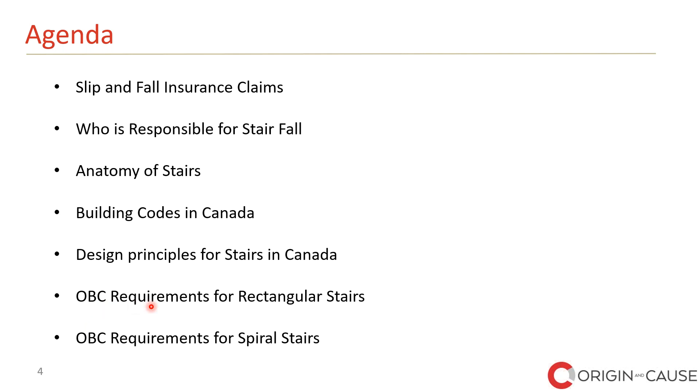In this presentation, first I will talk about slip and fall insurance claims. I'll give some statistics on that for Canada and US. We'll talk about who is responsible for stair fall. We'll give the anatomy of stairs and introduce some terms there. We'll briefly talk about building codes in Canada and how they are set up. We'll talk about design principles for stairs in Canada, and then we'll delve into Ontario Building Code requirements for rectangular stairs and also for spiral stairs. We will then talk about safety requirements for stairs in Ontario Building Code, and we will talk about historical changes in OBC requirements. Then we'll give some concluding remarks.

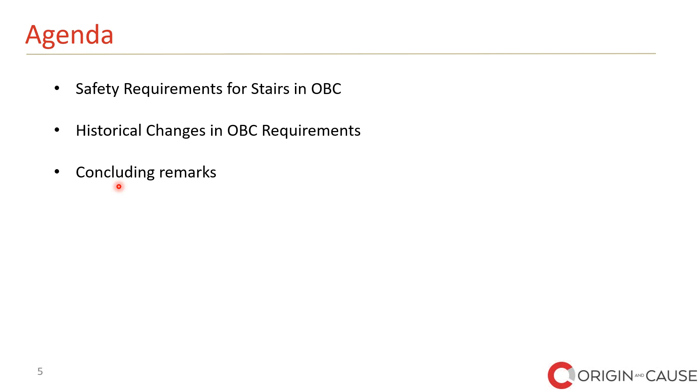Now let's look at some statistics about slip and fall on stairs. In the US, fall on stairs is the second most common cause of accidental death after car accidents. In British Columbia, about 8% of hospitalizations were due to stair-related injuries, based on the BC Injury Research and Prevention Unit, published in 2017. The same report said the cost of hospitalizations was over $17 million during the 2013 and 2014 fiscal year. The societal economic cost of stair-related accidents in Canada was $19.8 billion in 2004, according to Public Health Agency of Canada. Societal economic cost is the sum of medical cost, loss of productivity, and loss of quality of life.

So you can see that there's a huge impact on the quality of life and lives, and also on the economy. There's a huge impact by slip and fall accidents.

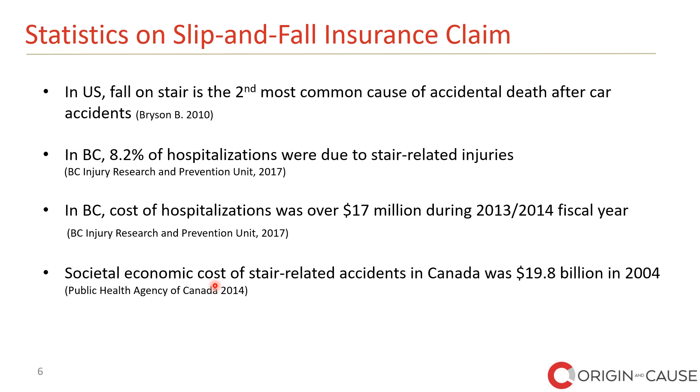Now let's see who is responsible for a stair fall. In terms of hierarchy, first is the designer. The designer should always design the stairs based on the building code of the jurisdiction. In Ontario, it's Ontario Building Code. In Alberta, for example, it's Alberta Building Code. Then the contractor is responsible to follow the design drawings and build the stairs according to the design and the drawings. Then the owner is also responsible to maintain the stair to keep meeting the requirements of the building code. And the stair user should also use the stair as it's intended to be used.

Now, for example, let's say a stair is perfectly designed and the contractor didn't follow the drawings and didn't install the handrails properly. That's the contractor's responsibility.

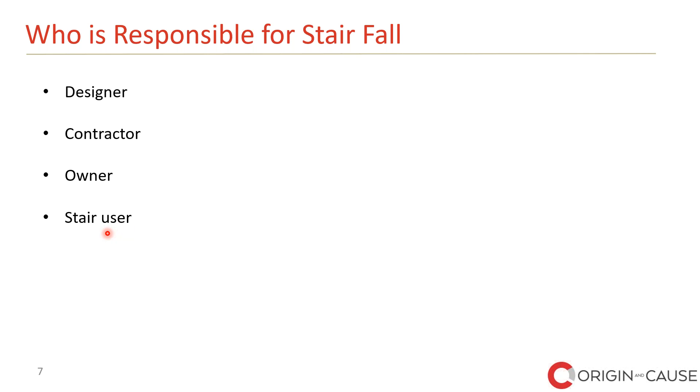Or let's say the stair is designed properly and the contractor built it correctly, but for some reason the owner decided to paint the stairs in such a manner that it's kind of invisible. So if you can see here on your left, the stairs cannot be distinguished. So if someone slips or trips over these steps, that's the owner's responsibility. We will talk about these later in this presentation.

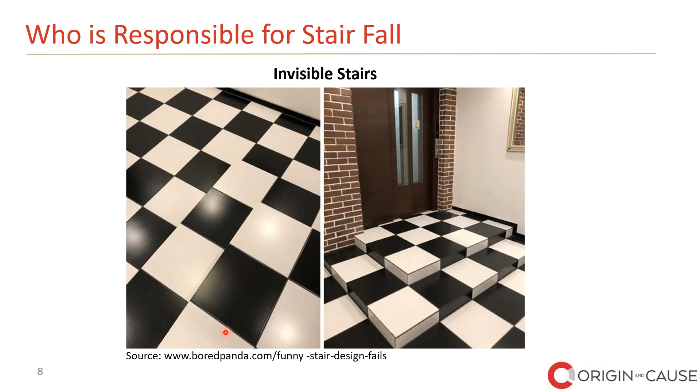Before we delve into the requirements of the steps, let's take a look at the anatomy of the stair. In this schematic, you can see a stair. This is the flight of stair. This is the floor level. You climb up the stair, you come up to a landing.

You have handrails. You have extension of the handrail at the top and bottom of the handrail. We'll talk about that. You have the ceiling above the stair, and you have the stair width. The stair width should be enough for people to climb up and down.

If I take a look at a step, it has a vertical element and a horizontal element. The vertical element is called the riser, and the vertical dimension of a step is called the rise. The horizontal dimension is called the run. And sometimes you have a projection of the runner beyond the adjacent step. This projection is called nosing.

Then we have a dimension called tread depth. So tread depth equals run plus nosing.

So when it comes to handrail, sometimes you have a wall beside the stair, and then you have the handrail right beside the wall. There should be a clear distance between the handrail and the wall. Otherwise, when you try to grab the handrail, you hit the wall and you cannot grab the handrail when you lose balance.

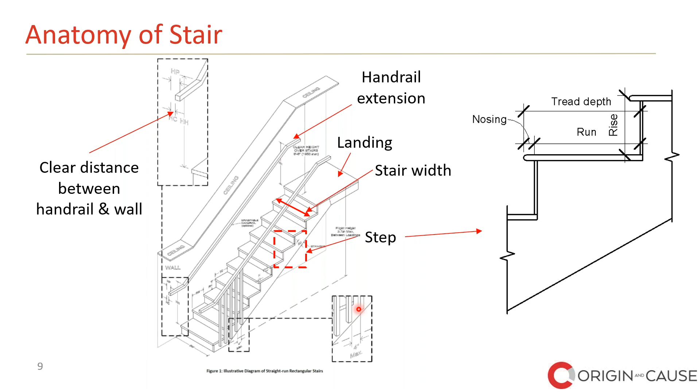Now, when it comes to stair types, the Canadian Building Code defines 3 classes of stairs: rectangular stairs, angled stairs, and winders. For angled stairs, you can see that the treads are not of uniform width. They are trapezoidal to make a turn, a kind of spiral shape. And then winders, the tread edges are concentric, so some of the treads are triangular.

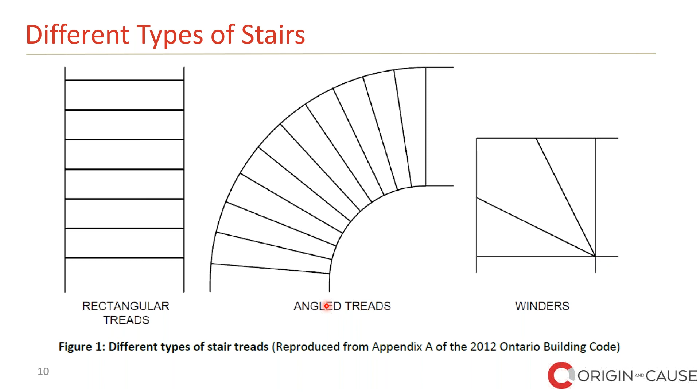Now, let's take a look at the building codes in Canada. In Canada, we have the National Building Code of Canada, which is just a model code and does not have legal status. It was first published in 1941, and it's been updated since then every 5 years on average. The latest edition is 2015. Provinces and jurisdictions in Canada adopt or amend the National Building Code, and then it becomes a legal document.

In Ontario, for example, we've adopted the National Building Code and changed it a bit, and now we have the Ontario Building Code. Other provinces do the same way. In Nova Scotia, for example, they exactly adopt the National Building Code with maybe some minor changes here and there. In Ontario, as I said, we have the Ontario Building Code.

It was first published in 1975, and the latest edition is Ontario Building Code 2012, which is OBC 2012. This is now the legal document in Ontario. In every province, as I said, they have their own building code, which is based on the National Building Code of Canada.

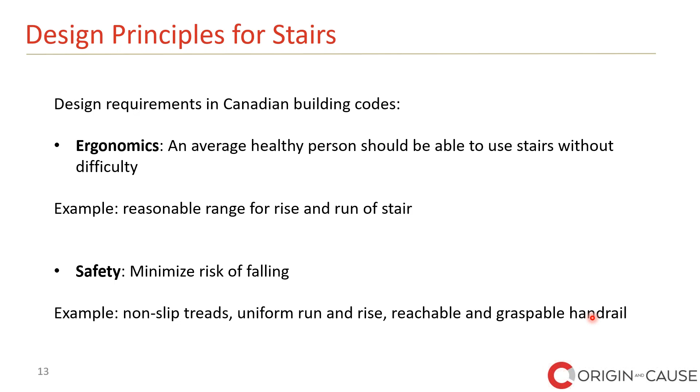Now I'm going to give you an example of a situation where these requirements are not met. This is a stair flight to a subway station in Sunset Park, New York.

Someone took photos of people tripping over a step on this stair flight, and it went viral on the internet. Apparently there was one step at the top of the flight that a lot of people would trip over. So it went viral, and somebody investigated and found there's a half-inch difference between one of the steps and the adjacent steps at the top of the flight.

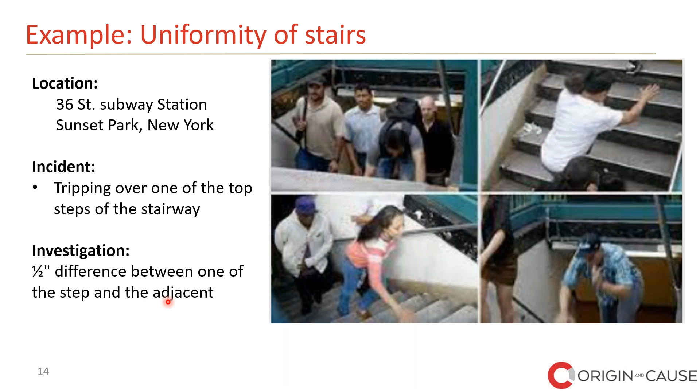When you think about a half-inch difference, you can't really see it. So I'm showing the section of the stair. One of these steps is half-inch higher than the other, but you cannot really see it visually. Here it is - this stair has all uniform rise. This stair flight, one of the rises is half-inch higher.

So a small difference can make a safety hazard.

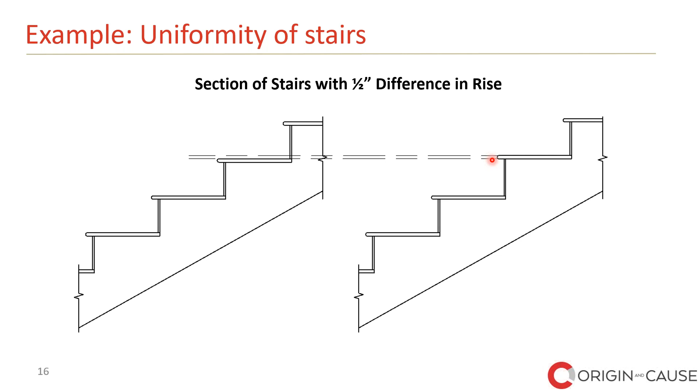Now I should mention that in any stair flight, when you take the first few steps, your brain automatically calculates the dimensions of the steps, and after that your brain automatically adjusts your stride, so you don't need to individually measure or look at the steps. It's your brain adjusting your stride based on pre-calculated dimensions from the very few steps you took. Now if along the way one step is odd, you'll trip over it because it doesn't match the calculations. So it's very important to have uniform steps with the right size and dimensions.

Now let's take a look at some of the OBC requirements for rectangular stairs. As I said, rectangular stairs have uniform width along the step.

Width of stairs in residential buildings should be 36-inch minimum. Stairs serving single dwelling units, which are single family houses, should be minimum 34-inch wide. Stairs in non-residential buildings should be minimum 36-inch wide, or 5/16 of an inch per person based on occupant load limits specified by the Ontario Building Code.

The Ontario Building Code has a long table which gives the minimum area per person for that specific type of building. For example, for classrooms it says there should be a minimum of 19.91 square feet per person. In a school shop or vocational room, it should be 100 square feet per person.

Now based on these, technically, you can calculate the maximum number of people who are allowed to use a specific building based on the Ontario Building Code. Let's take a look at an example.

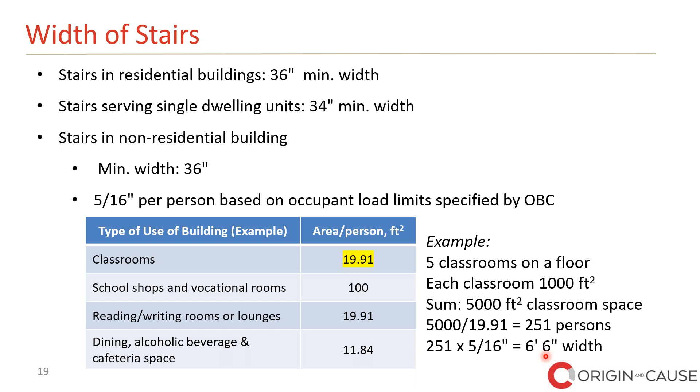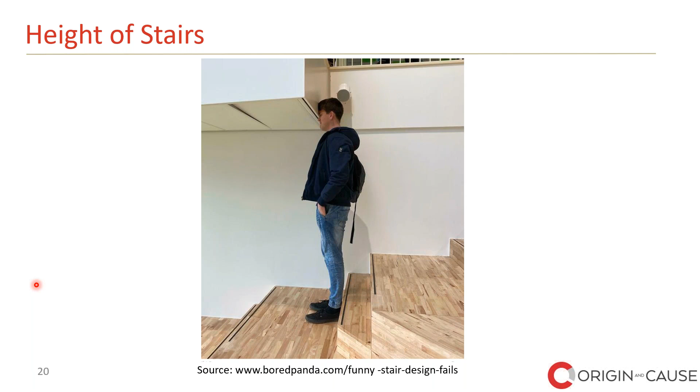Now, height of stairs. Obviously the stairs should have enough headroom so you don't bump your head on the ceiling. The Ontario Building Code states there should be a minimum of 77 inches of headroom in single dwelling units, which are single family houses, or a minimum of 81 inches in other buildings.

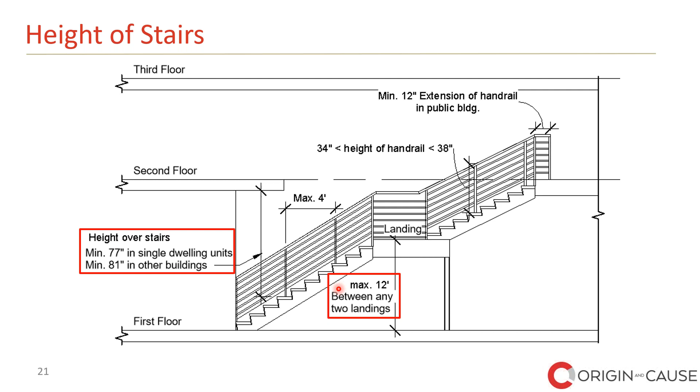And between adjacent or consecutive landings, there should be a maximum of 12 feet height between consecutive landings. This is to avoid fatigue when using stairs - if it's higher than that, you get tired by the time you get up the stairs.

Run and rise of steps: there should be a minimum number of risers in dwelling units, in houses. Less than 3 risers is a tripping hazard.

The dimensions are given in a table in OBC 2012. For rise, for service and mezzanines, minimum 5 inch, no maximum. For private buildings, houses, the rise should be between 5 inch and 8 inch. For public buildings, 5 inch and about 7 inch.

Here I should mention that in general, the requirements for public buildings are more strict than requirements for houses. The reason is that for houses, you are very familiar with the environment of your house and the stairs in your house. But for public buildings, people are not familiar with the environment, so the requirements for public buildings are more strict.

Let's get back to the table. For rectangular treads, the run, which is the horizontal dimension of the step, should be maximum 14-inch for service and mezzanine spaces, and between 8.25-inch to 14-inch for private buildings and houses, and should be minimum 11-inch for public buildings. Tread depth, as I mentioned, is run plus nosing.

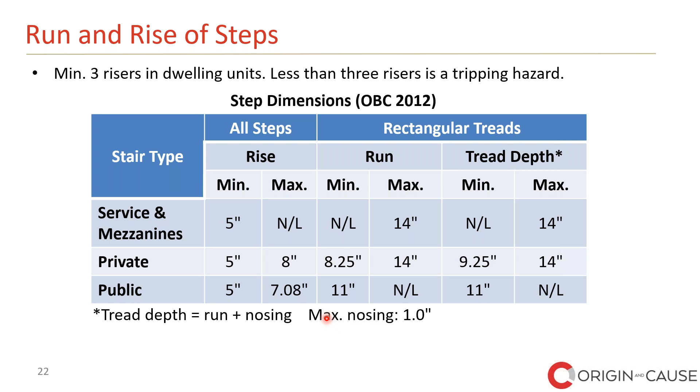Where you have a winder, first of all, the winder should be less than 90 degrees, and the angle treads should be between 30 to 45 degrees of angle, and the run is measured at the center of the step. So the average run should be between 6-inch and 8-inch.

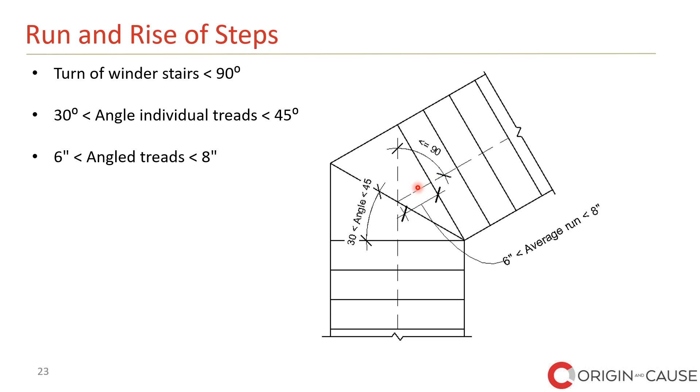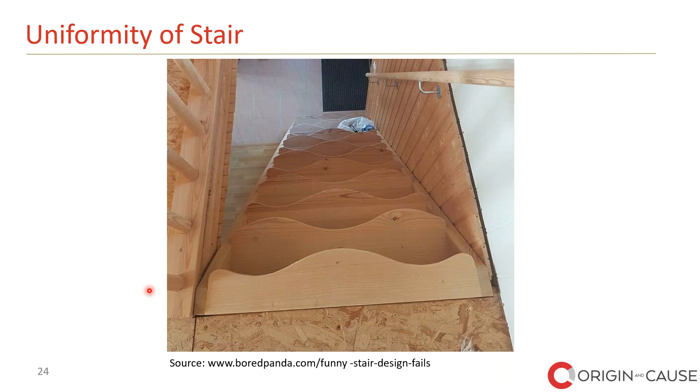Uniformity of stairs: stairs should be uniform so that you don't have to individually look at the steps to calculate what kind of stride you need to take. As I said, that's how your brain adjusts your stride as you are walking up and down the steps. After a few steps, your brain has pre-calculated dimensions, and then it uses those dimensions to adjust your strides as you walk up and down the stairs.

The tolerance of rise and run between adjacent treads should be 3/16 of an inch, that's about 5 millimeters. The difference between the largest and smallest run and rise should be 3/8 of an inch, which is about 10 millimeters. The slope of treads should be less than 1/50.

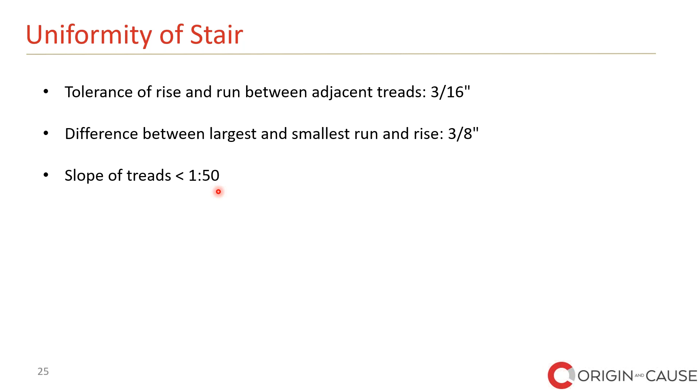These requirements are given graphically here. AR is adjacent rise, which is rise height plus or minus 5 millimeters, which is 3/16 of an inch. Adjacent tread, as I said, tread is the run plus nosing. Adjacent tread is tread depth plus or minus 5 millimeters.

Rise height, as I said, for private stairs in houses, is between 5-inch to 8-inch. For public stairs, 5-inch to 7-inch. The difference between the tallest riser and the shortest riser should be 10 millimeters, which is 3/8 of an inch. And the difference between the deepest tread and the shallowest tread should be 10 millimeters again.

We will talk about this later, but tread depth—you have the tread depth, you have the nosing. The nosing should not take away from the required tread depth by more than 15 millimeters, which is 5/8 of an inch.

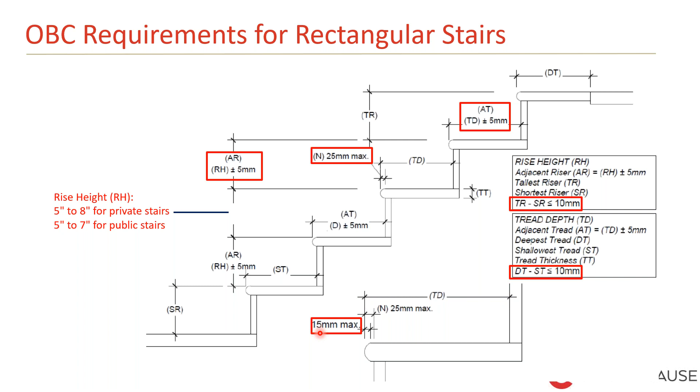Handrails. Handrails serve to guide the stair user up and down the stair, and this is very important for people with impaired vision, and also people who are carrying bulky items.

It also provides safety for the stair user, so that if you lose balance, you hang onto the handrail to regain your balance. Having said that, if you're running up and down the stair and you're not using the handrail and you trip over a step, that's not the designer's fault, that's not the builder's fault, it's the user's fault. So if you're not using the handrail, it's your own responsibility and your liability.

The minimum number of handrails within a dwelling unit: for houses, minimum you need 1 handrail. For other buildings, you need 1 handrail for rectangular stairs. For spiral stairs, you need 2 handrails. And if the width of the stair is greater than 3 feet 7 inches, again you need 2 handrails for public buildings.

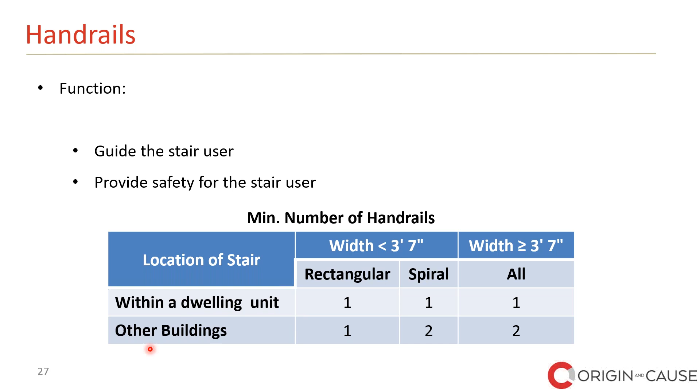If the required width of the stair is larger than 7 feet 2 inches, you need an intermediate handrail, a third handrail. I gave an example on how to calculate the minimum width of stair based on occupant load of the building. You do that calculation. If you figure that the minimum width is greater than 7 feet 2 inches, you need a third handrail.

The third handrail should be positioned such that the distance between any 2 handrails should not be larger than 5 feet 4 inches. The idea is that someone in the middle of the stair should have enough access to a handrail for safety reasons.

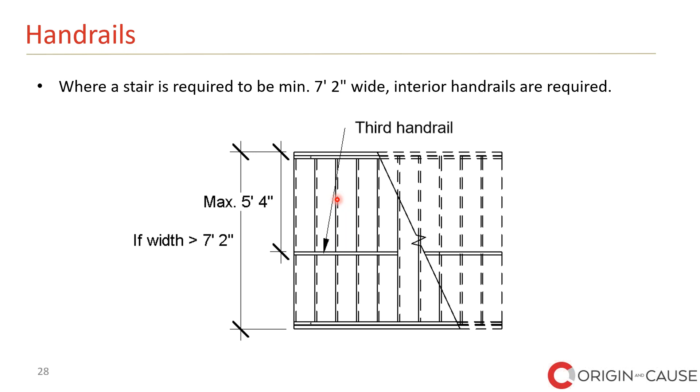The height of the handrail should be between 34 inch and 38 inch. There should be an extension at the top and bottom of the handrail, minimum 12 inch. This is for guiding the user, to indicate so that the user knows when they arrive at the top or bottom of the handrail. Again, this is very crucial for visually impaired people or people with some disabilities or people who are carrying bulky items.

The distance between the posts of the handrail should be maximum 4 feet. So this is the distance between either posts or connection of the handrail to the wall behind it.

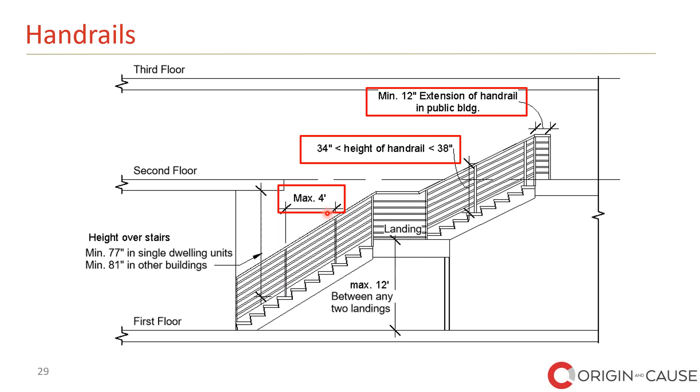So this is a graphical representation of the requirements for rectangular stairs. As I said, you should have handrails. They should be graspable. The shape of the handrail should not be such that it's difficult to grab it. So you should be able to grab the handrail properly to hold on to it.

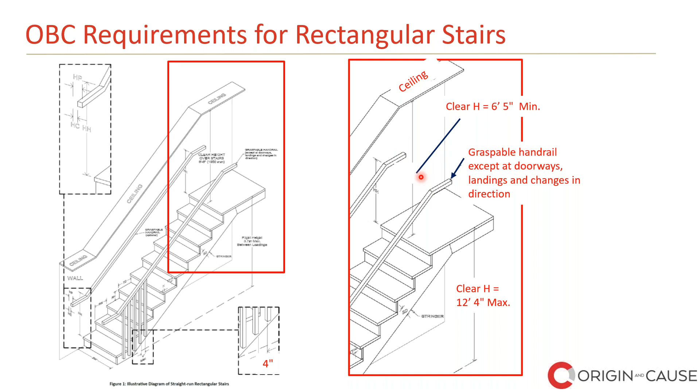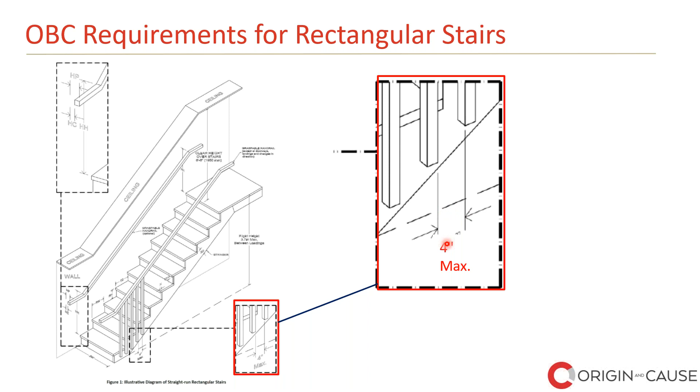We talked about the clear height of the stairs. There should be railing attached to the handrail, and the maximum opening of the railing should be 4 inch for houses. For industrial buildings, it can be 8 inch, but for houses, it should be maximum 4 inch.

If there's a wall beside the handrail, there should be a minimum 2 inch clear distance between the handrail and the wall. Otherwise, when you're reaching for the handrail, you might hit the wall and not be able to grab the handrail when you're about to fall.

The other requirement is that the handrail and its attachment should not reduce the width of the stair by more than 4 inch. So usually you have the handrail and a piece here that attaches it to the wall - that total projection should not be more than 4 inch.

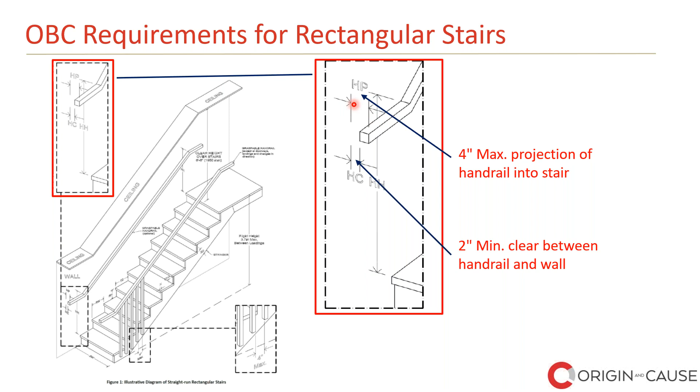Now let's take a look at the example. This is a stair to a restaurant. A restaurant patron slipped and fell while going down. We reviewed the information - the building was renovated in the 1980s. At that time, OBC 1975 was in effect.

We measured the stair width to be 44.5 inch wide. There was no requirement for uniformity of steps in OBC 1975. We measured it - we measured the run and rise of every step, and I'll show you in the next slide, but there was no requirement for that.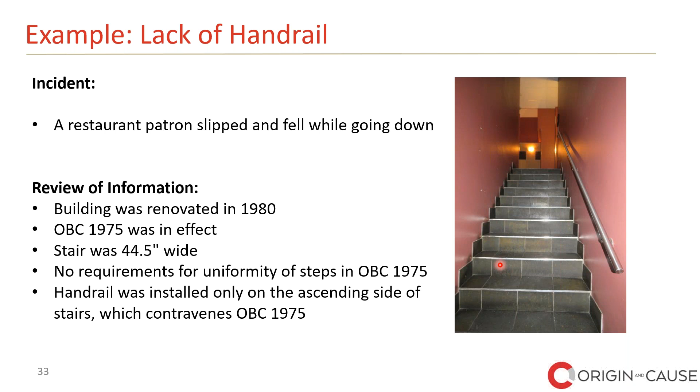Now let's take a look at the uniformity here. If I can show it - so we measured the steps here. You can see the rise of every single step: 7.5 inch, 7.5 inch, 7.38 inch, 7 inch, 7.25 inch. Now you can see here, adjacent steps have a 1/4 inch difference.

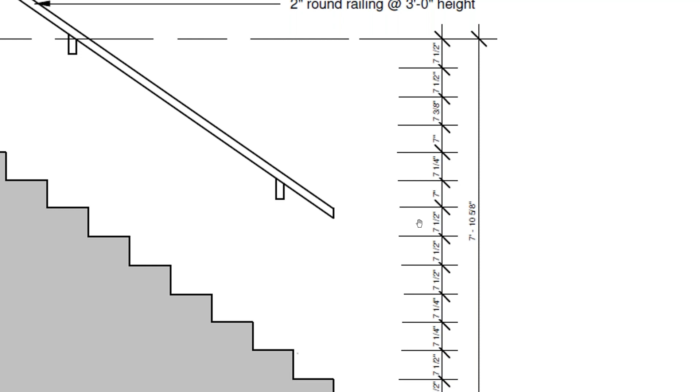Which is 4/16. The maximum allowable tolerance based on OBC 2012 is 3/16. Again, going down here: 7 inch, 7.5 inch - again a 1/2 inch difference. So this is not acceptable based on OBC 2012.

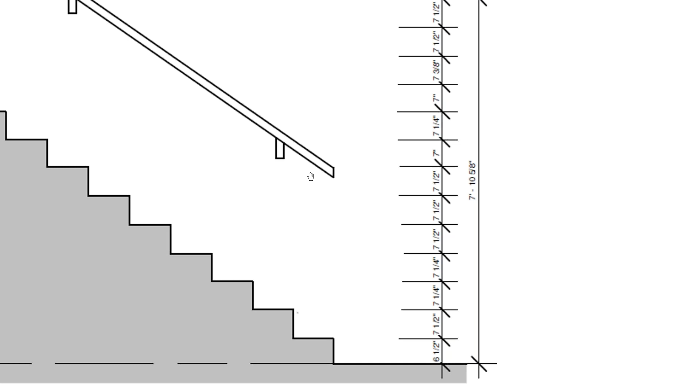But regardless, this was built - renovated in 1980. So OBC 1975 was in effect, so this condition was not litigable. The only contravention here in this particular example was the lack of 1 handrail.

Attachment of handrails: obviously, the handrails must be attached to the wall or floor properly so you don't fall when you grab onto it. Attachments of handrails should resist a minimum 200 pounds concentrated load. When you're climbing and using the stair and hanging onto the handrail, you're applying some force to it. Some of it is perpendicular to the handrail. That force - the handrail should resist 200 pounds of that kind of concentrated load.

In a public building, imagine a group of people going upstairs all hanging onto the handrail - that creates a uniform or distributed load. Now imagine you're 5 feet away from the person in front of you and you're applying 5 pounds on the handrail - 5 pounds divided by 5 feet is 1 pound per foot of distributed load. The code says that in public buildings, handrails should resist a minimum of 48 pounds per foot of distributed load. So these requirements should be met.

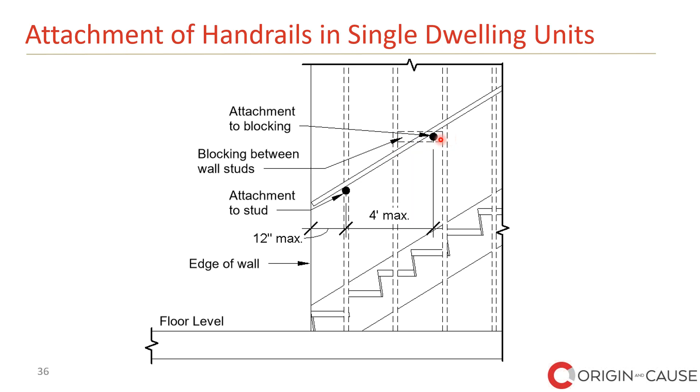Now let's take a look at the example here. This is a single family house. A person was climbing up the stair, grabbed onto the handrail, lost his balance, grabbed onto the handrail again, and the handrail broke and he fell down.

We attended the site and noticed that the handrail was attached to drywall, not a blocking, and that is very important. I'm going to show you a sketch here. This is the wall behind the handrail, these are the wall studs, and what we found was that there was a solid wood behind the drywall in the wall cavity.

So what happened in this case was the framer installed the wall and stair, then the drywall installer did all the drywalls in the house. Then the handrail installer came in and wanted to install the handrail connection, and he didn't find any blocking between the studs. What he did was cut a hole in the drywall, put a blocking in the cavity, and attached it to the drywall with some screws, then attached the handrail connection to that blocking, and then patched up the drywall, and that's it.

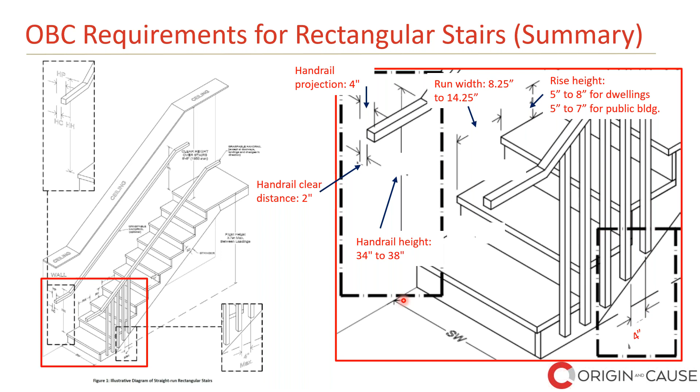So this is a summary of the requirements for rectangular stairs that we talked about. Nothing new here really - 4-inch projection, 4-inch maximum opening between the guards, and handrail height.

Now let's take a look at the spiral stairs. The run should be minimum 6-inch and average 8-inch. The flight height should be 12 feet 4-inch maximum between landings, and stair width 34-inch for dwelling units and about 35.5-inch for public buildings.

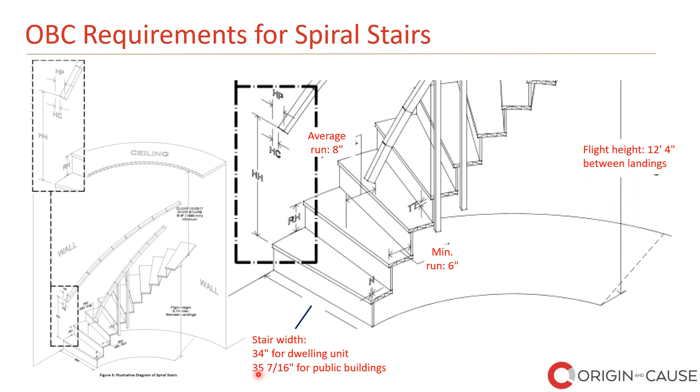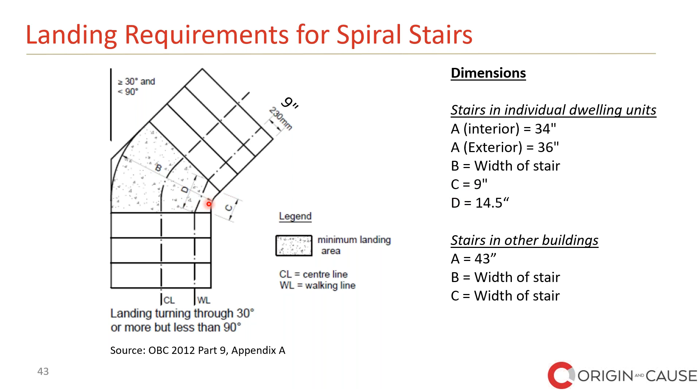C, at the end of the stair, for public buildings should be the width of the stair. For houses it should be 9 inches minimum. When you have a 90 degree turn or more, the landing just has a width of B, which carries all the way along the turn.

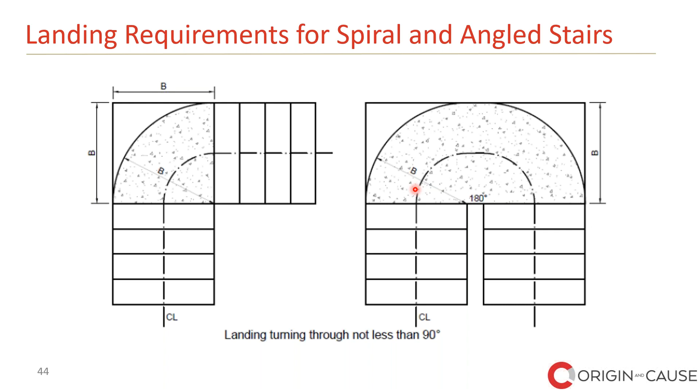Now, safety requirements. In previous slides I talked about strength of handrail attachments. Also, strength of stair framing and treads should meet the requirements of the Ontario Building Code. The surface of a stair should be slip resistant, and there should be enough lighting for the stair. If the original building design had enough lighting, but the lighting is now broken and somebody slips or trips over the step, then it's the owner's liability because they did not maintain enough lighting.

Or the surface of the stair might be designed properly, but if it's wet and there was no warning sign around the steps, then it's the owner's liability.

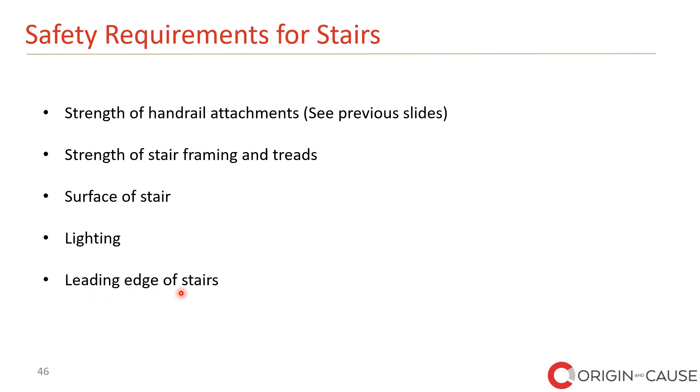Leading edge of stairs should be properly designed, which I'll talk about in coming slides. Surface of stairs should be wear resistant, slip resistant, smooth, even, and free from open defects. In public buildings, treads and landings should have a slip resistant finish or slip resistant strips extending maximum 1 millimeter above the surface. For houses, acceptable finishes include hardwood, vertical grain softwood, resilient flooring, low pile carpet, matte finish, ceramic tile, concrete, and plywood for stairs going down to an unfinished basement or garage.

Steps should be visible, so the leading edges of the steps should be visible. Otherwise, the stair user cannot distinguish between the different steps and might trip. A sloped or beveled edge improves visibility, and stairs in public buildings should have color contrast or a distinctive pattern to demarcate the leading edge of treads and landings.

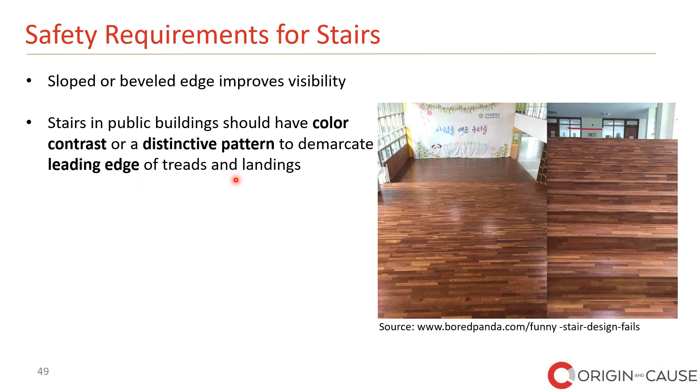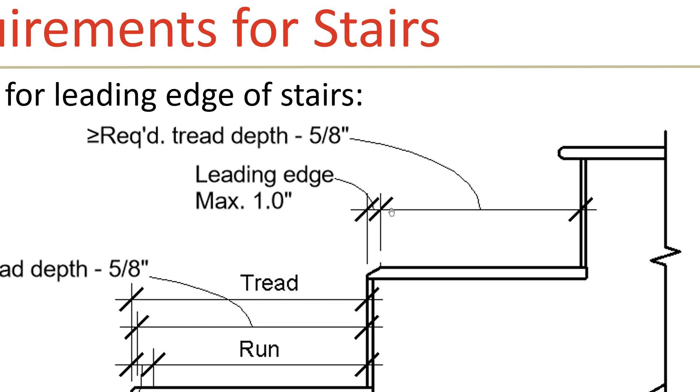Let's take a look here. This is a section of a stair, a step with nosing. The nosing should be maximum 1 inch. Looking at the nosing closely, you have the run plus the nosing, which has a straight line and also a rounded part. The rounded part should not take away from the required tread depth by more than 5/8 inch. Sometimes you have nosing, sometimes a beveled edge. The beveled edge should not take away from the required tread depth by more than 5/8 inch, and that beveled edge should be maximum 1 inch.

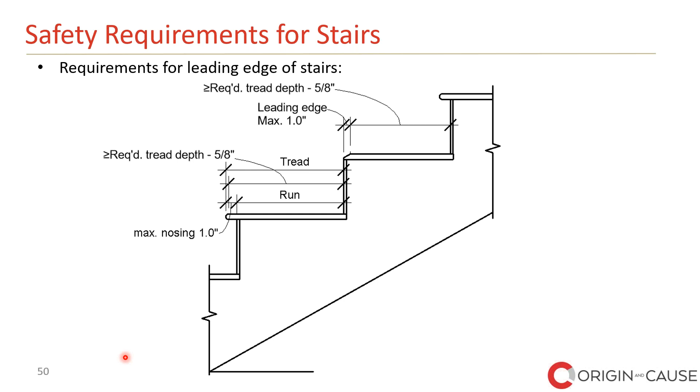Having said that, it is possible that everything is designed and built properly, but if the owner puts a carpet on the stair that hides the leading edges and renders them invisible, and somebody trips over a step, then that's the owner's liability.

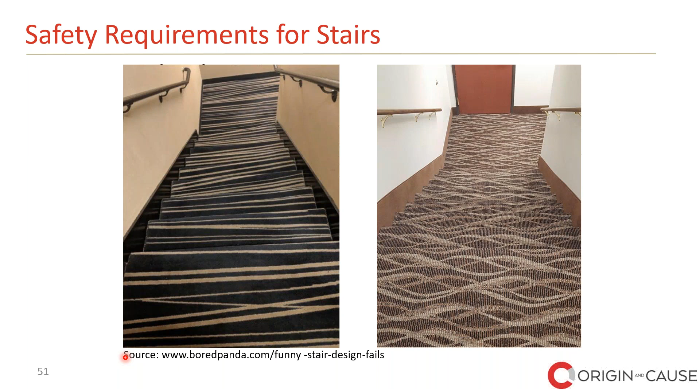Historical changes in OBC requirements. OBC requirements developed over the years since 1975. Let's take a look at rise and run. Prior to 1997, there was no minimum rise; after 1997, they set the minimum rise at 5 inches.

Prior to 1997, there was no maximum run; after 1997, they set the maximum run at 14.25 inches. For nosing, prior to 1997, the nosing was 1 inch where the run was less than 10 inches, but from 1997 onwards, they said nosing can be anywhere between 0 inch and 1 inch.

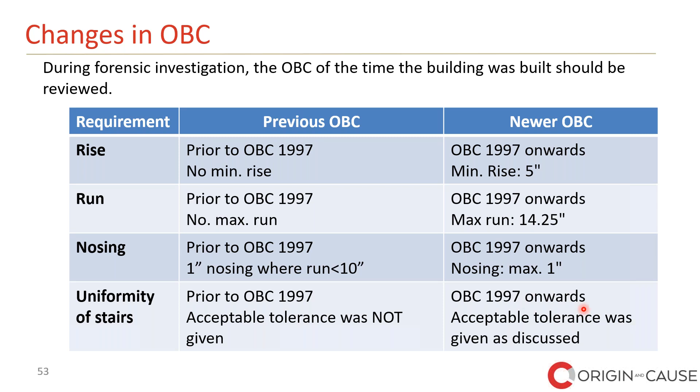Uniformity of stairs: before 1997, no acceptable tolerance was given in the code. The code just said the stairs should be uniform, but no tolerance was given. After 1997, they gave the tolerances.

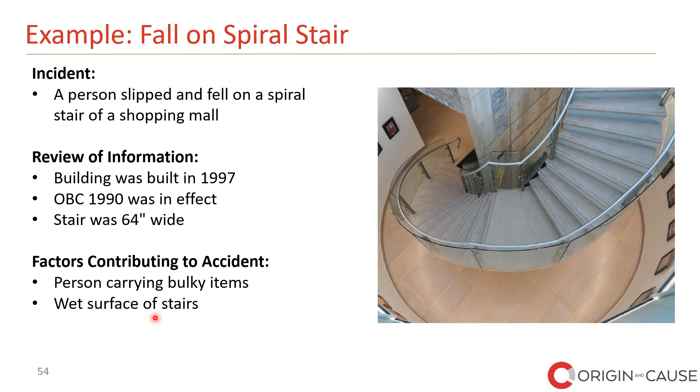Now let's take a look at an example. In a shopping mall, a person slipped and fell on a spiral stair. The building was built in 1997, so the 1990 code was in effect, and the stair was 64 inches wide. We took a look at the surveillance camera footage and found the person was carrying bulky items, so that part was the user's responsibility. Also, the stair was wet and there was no warning sign installed around it, as it was just recently washed, so that part was the owner's responsibility.

We also measured the run of the treads.

The successive difference between different runs, you can see here, is 12.7 millimeters. The maximum allowable run is 3/16 of an inch. And here the shallowest tread and deepest tread, the difference was about 16 millimeters. But the allowable difference between shallowest and deepest tread is 10 millimeters.

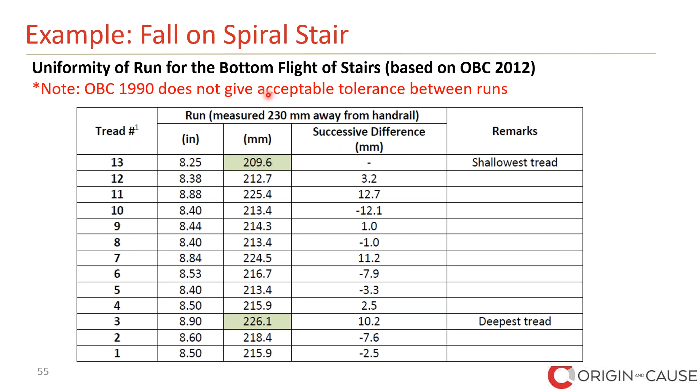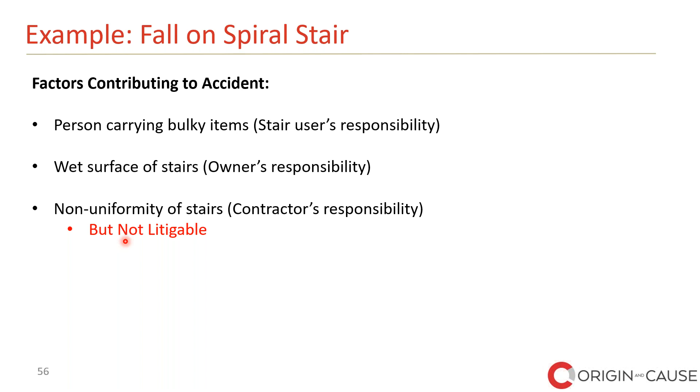Having said that, OBC 1990 doesn't give acceptable tolerance between runs. Therefore, yes, the stair was non-uniform based on OBC 2012, but it was not litigable. So to wrap this example up, the person carrying bulky items, it was the stair user's responsibility. Wet surface was the owner's responsibility, and non-uniformity of stairs was the contractor's responsibility, but it was not litigable because it was built before 2012.

So in conclusion, stairway accidents lead to numerous serious injuries and significant financial losses. Canadian code key requirements address ergonomics and safety, and requirements for rectangular and spiral stairs were reviewed in this presentation.

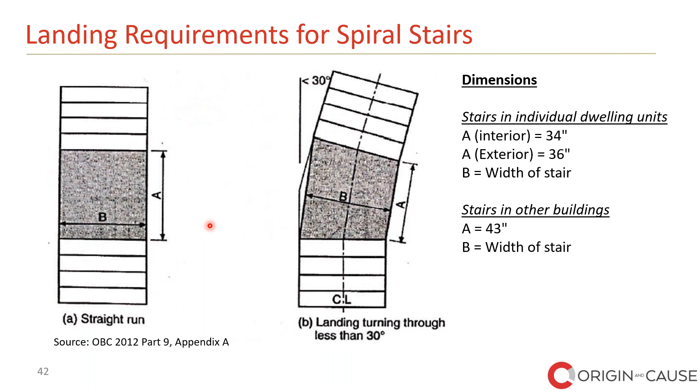Referencing slide 37, do you mind flipping over to it? I think it's an image. Are there any requirements in the Ontario Building Code about vertical sections of handrails at winders? What do you think of that design in the picture?

Not particularly at the vertical, at the winders - it doesn't particularly say it should be such and such for winders. All it says, the main requirement, is that no matter how you put the handrail, it should resist 200 pounds concentrated load. This is for houses.

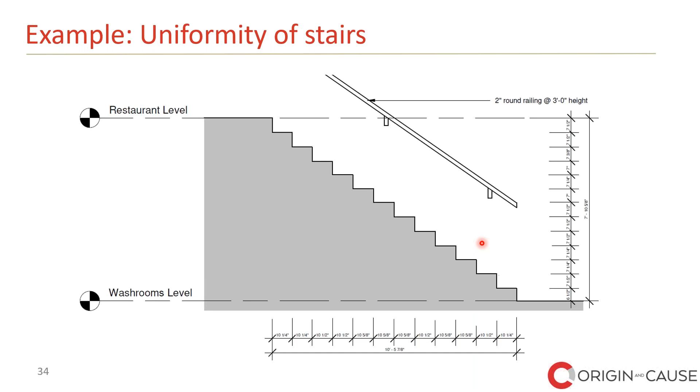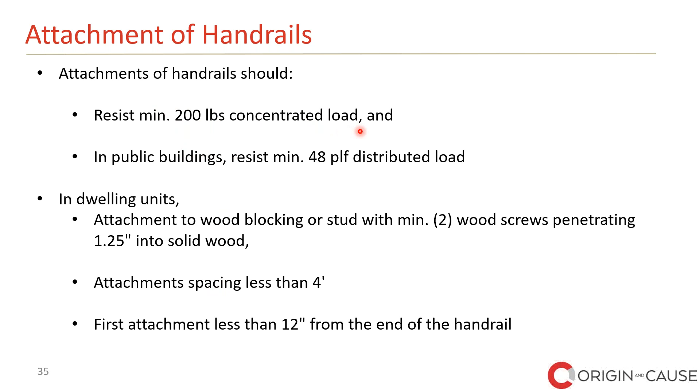It does not necessarily say what to do at winders. The main requirement covering all different scenarios is that no matter the condition - winders, straight, or whatever - it has to resist 200 pounds. In houses you can do solid blocking and attach it to studs. But if there's a particular condition like a winder or spiral stair, you should still look at these requirements and design the handrail and connections properly.

Okay, thank you. Yeah. Is there any code requirement for the finish on stairs in residential homes, as in can polished tile be used?

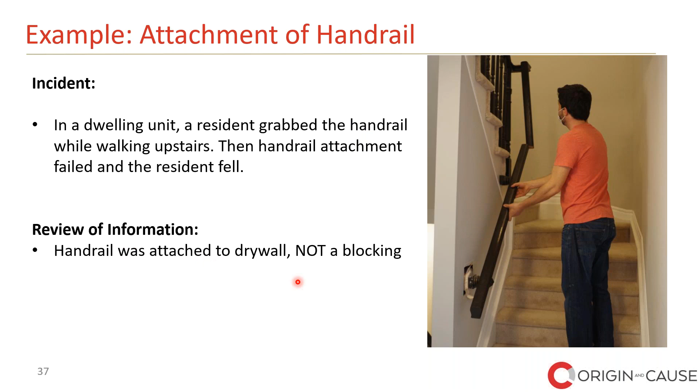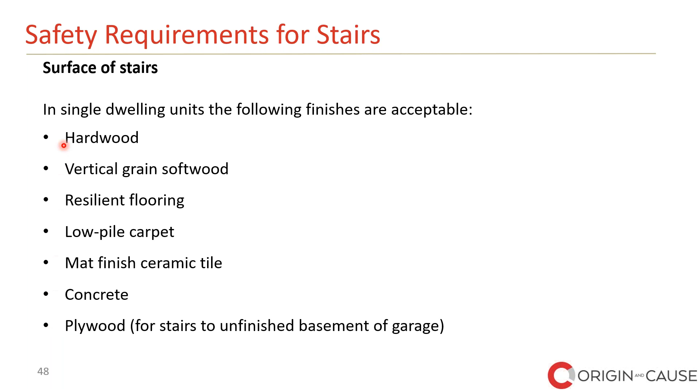Polished tile. Specifically, the Ontario Building Code gives you these - these are the ones specifically mentioned in the building code. Polished tile is not mentioned here. Regardless, it needs to be slip resistant. So anything other than these, you can use, except that it has to be slip resistant - it has to have some sort of pattern or something that makes it slip resistant. Again, these are the main requirements, and it says instead of meeting these requirements, you can use directly these types of finishes. If you want to use another finish not mentioned here, you should make sure it meets these requirements: slip resistant, wear resistant, smooth, even, and free from open defects. I think that's pretty clear.